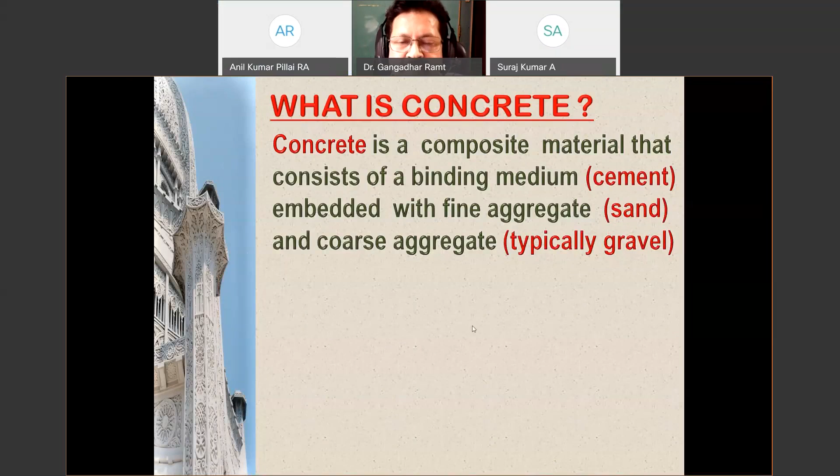The cement and water form a paste that hardens and bonds the coarse and fine aggregate together. Coarse and fine aggregates, on the other hand, are basically inert fillers possessing good strength and durability - these are important features of coarse and fine aggregate. Concrete is often looked upon as a man-made rock, meaning the strength of rock combined with the shape and size of our willingness - that combination is concrete. So concrete is often looked upon as man-made rock.

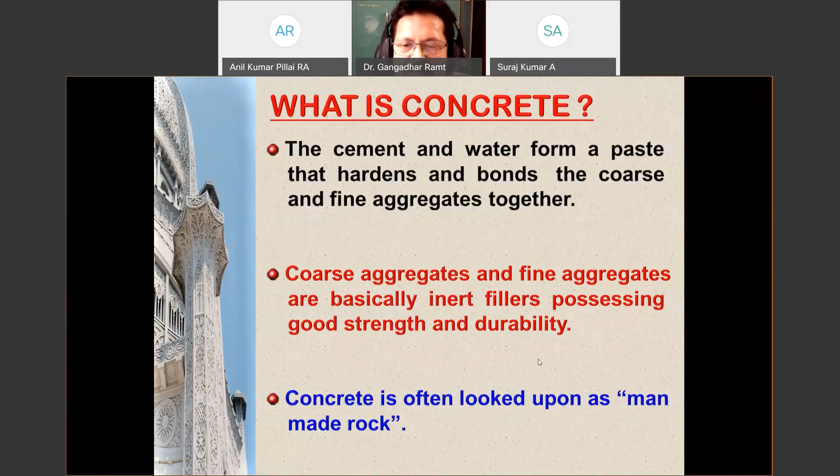Because of all this simplicity of making concrete, concrete is by far the most widely used building material worldwide, next to water. The primary reason for its huge consumption is that it possesses excellent resistance to water, meaning a good waterproof structure can be constructed using concrete.

Its ability to be plastic initially and solidify after a few hours is another good property. Whatever shape we like, we can cast that and make a stone out of it. That is the specialty of concrete.

Most importantly, it is readily and economically available at site, because in concrete only the cement is factory manufactured, apart from new chemicals being added. The coarse aggregate, fine aggregate, and water are locally available materials, hence it is economical at site.

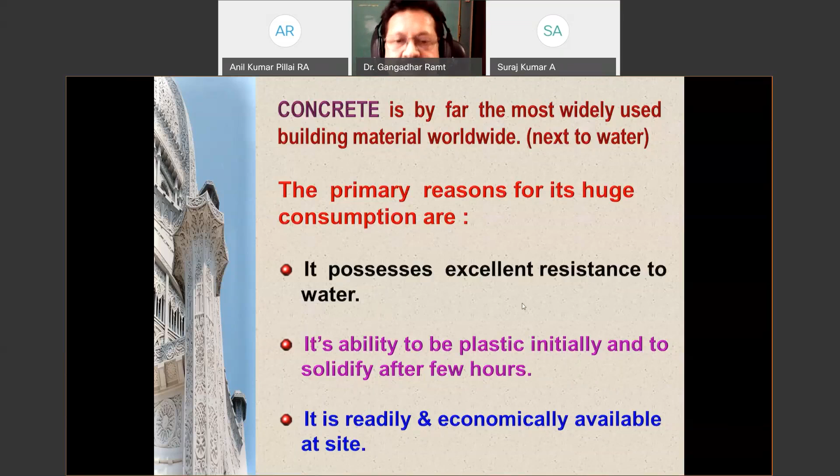The main advantage, first, is its mechanical property. From a structural engineering point of view, we look at high strength. Concrete gives us high compressive strength, but it's not only high compressive strength that's important. We also require high modulus of elasticity, because we don't want high deformation. We want, with small deformation, to achieve this high compressive strength, so it can be used for building purposes without losing serviceability. This is provided by concrete, and is the first property that makes it important as a building material.

The second is durability. It has very good weathering resistance, but with a question mark. The question mark is not on the concrete itself, but on the way we are casting and doing the concreting work - whether we are compacting it, curing it, or giving proper cover to reinforcement. These are issues attached with durability rather than concrete itself. Concrete gets defamed because of inability in execution, that is what I feel.

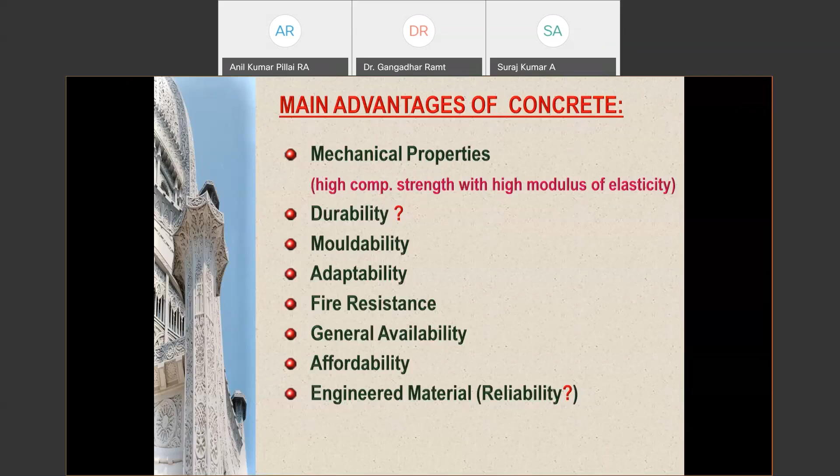It has good moldability and adaptability, meaning wherever we want we can use it, even in deep sea areas and freezing areas concreting can be done. Its adaptability, moldability, and fire resistance are good. General availability means almost everywhere we get cement plants, and basic materials like coarse and fine aggregates are available everywhere. It is quite affordable, and it is an engineered material - 60-70% is locally available material, and factory-made material is only cement. It is also a reliable material, meaning we can assure its strength if properly made. These are the basic advantages and specialty of concrete as a building material.

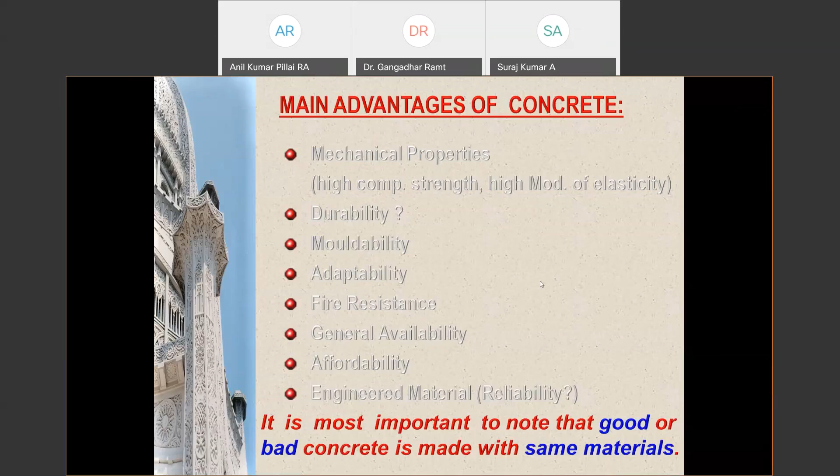In that sense, it's most important to note that good or bad concrete is made with the same material. This point we must keep in mind - good and bad concrete are made with the same amount of material; it's only a matter of our involvement. The basic components are cement, aggregate (fine and coarse), water, and admixture - these form the basic ingredients of concrete.

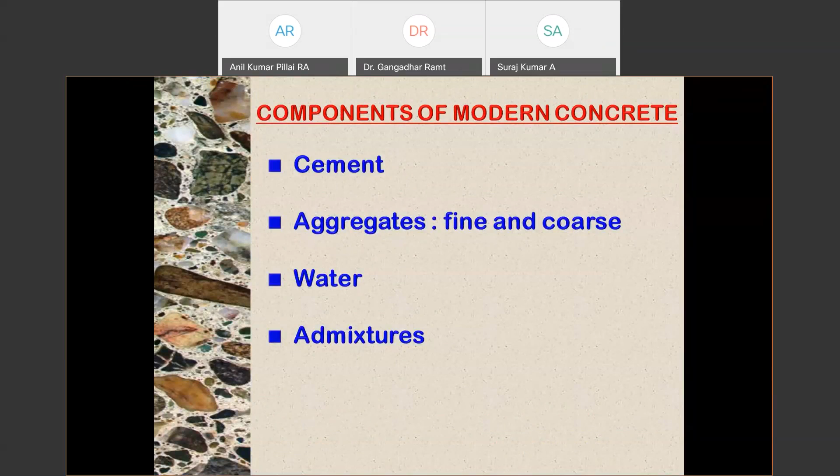The biggest question for today's presentation is how to make good concrete. I hope every engineer and architect will agree that good concrete can be made by the positive efforts of an engineer or architect. If we agree with this, we must also agree that bad concrete can be made by the ignorance of the same engineer or architect. So positive effort can make good concrete, and ignorance of the same engineer can make bad concrete. It is not the concrete that is good or bad, it is our human effort that may be positive or ignorant.

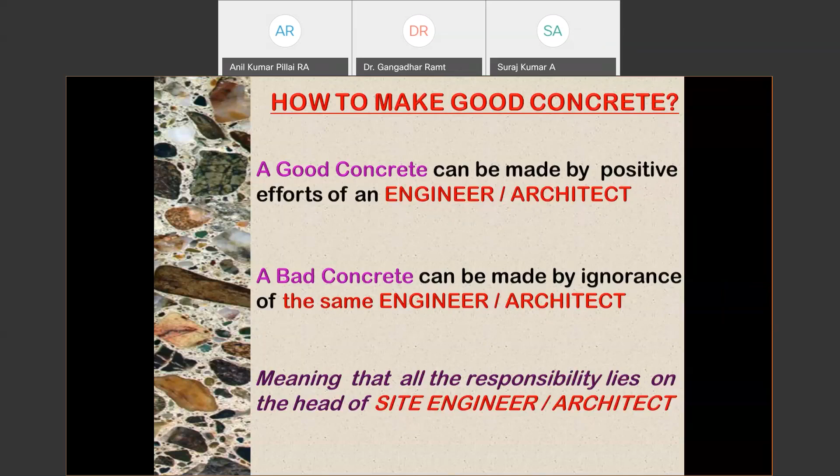So all the responsibility basically lies on the head of the site engineer. We must remember that concrete can do wonders if properly made - there are wonderful structures worldwide which reflect the gigantic test and good quality of concrete. But at the same time, concrete can do blunders if not made properly, and we see many blunders associated with concrete structure systems. It all depends on what effort, what way of effort we have put in.

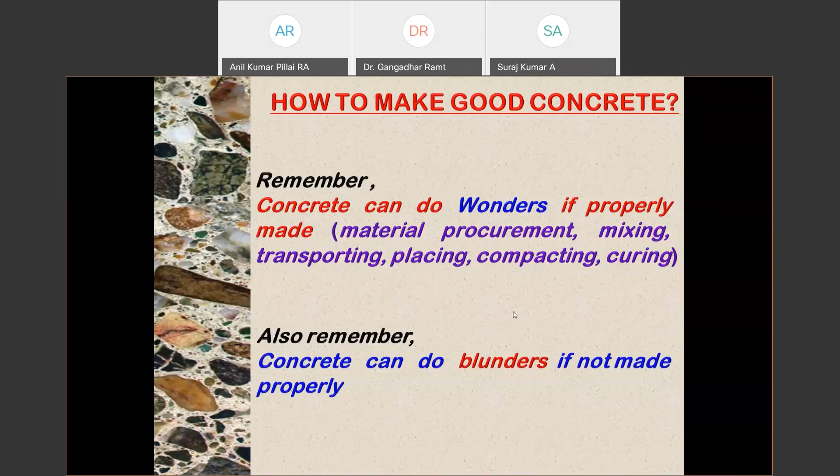Now coming to the necessary steps for making good concrete.

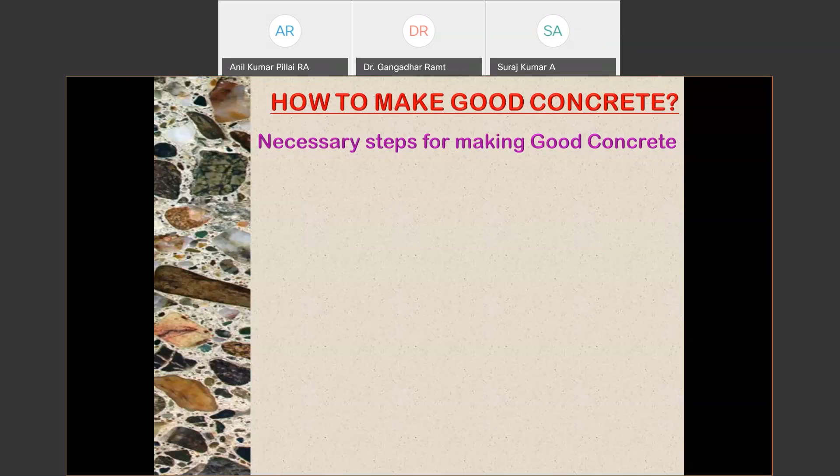The first step is the need for brushing up knowledge by a field engineer and architect. This is very important because at many places I've seen that once students pass out from institutes, they go into the field and leave their books and courses aside, completing work based on whatever knowledge they have or whatever the masons tell them.

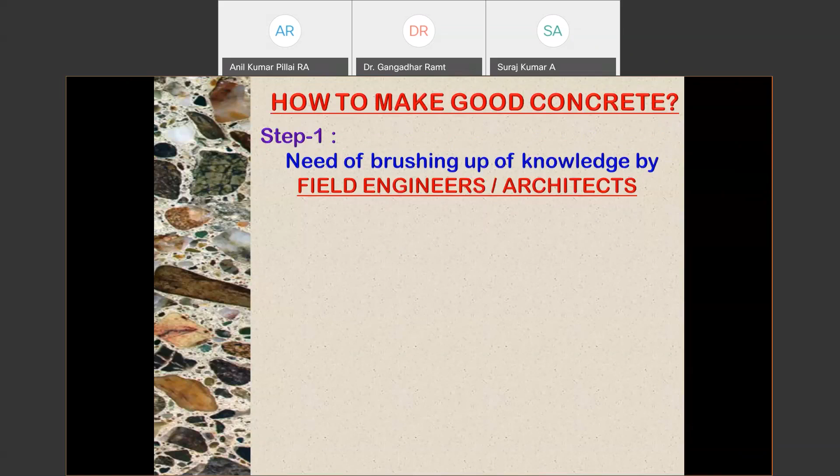So it is very important to have something like a book. My point is that kindly have a hard copy or soft copy of the relevant IS codes and a book on concrete technology. It may not be for daily reading, but for referring whenever required.

Whenever we find some problem or issue in concreting, come back home at night and brush up on those things. It is given in the literature in a more justified and logical way, elaborated in the books. That will make our knowledge more sound for the field engineer. This is the first step basically for making good concrete.

One important thing is engineers and architects should educate their fellow persons involved in the concrete making process, because the actual person involved is the one associated with the mixer and compacting of the concrete. Sometimes, because of their experience, they don't listen to the engineer if he is younger in age. But it is our job as field engineer and architect to make them understand the relevant importance of each and every process carried out for making good concrete.

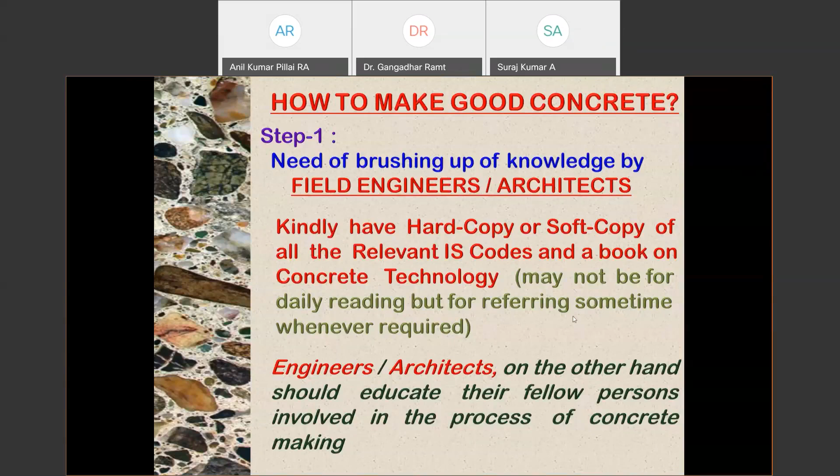So this is the first step. Now coming to the second step, procurement of material. It is very important. We generally go with whatever coarse aggregate and fine aggregate is available locally, and sometimes with cement certain priorities are fixed, but otherwise it is also taken that way.

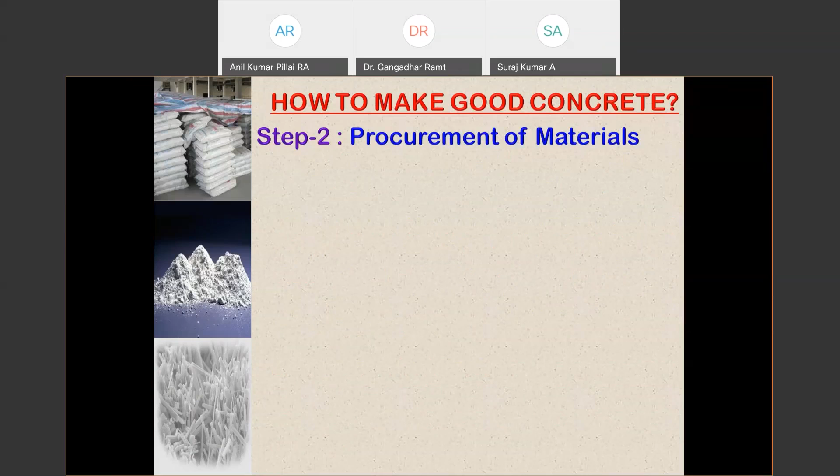So procurement of material - I would like to talk about cement first. Cement is a factory-produced building material used as a binding material for concrete because of its property of having good adhesion with the aggregate. It binds properly the stone pieces like coarse and fine aggregate with strength in presence of water. This is what cement actually is.

A variety of cements are available in the market, but nowadays OPC is not highly used. PPC and PSC cement are mostly used because of their advantages from a durability point of view, and they're in special demand now. OPC is manufactured in the factory. There are many other cements, but for general purpose these three categories are being used.

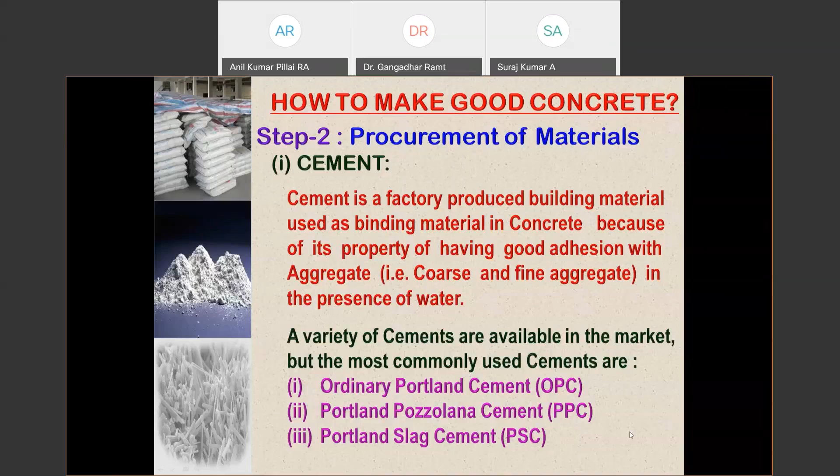Since cements are manufactured under good quality control in sophisticated factories, one can rely on its quality because it goes through various quality checks there. However, for the field, IS code provides various test procedures for quality checks of cement which can be done at the site laboratory, and that is mostly done in the field.

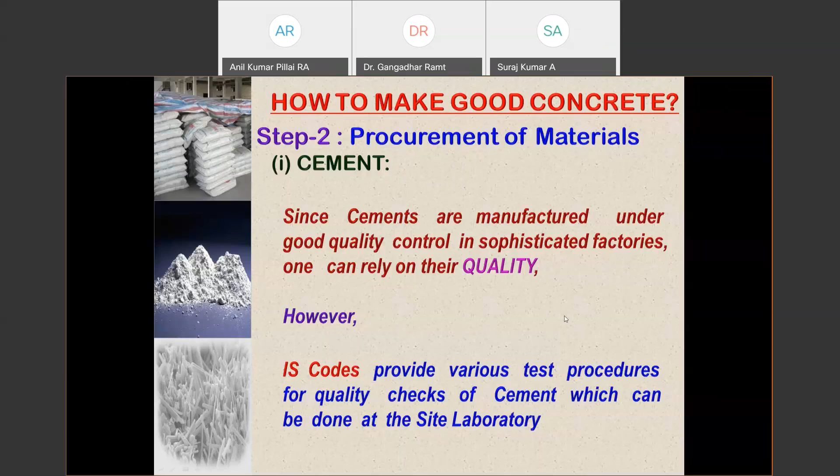Second important material for concrete making is coarse and fine aggregate. If we look at a concrete mixture, it's cement-water paste mixed with inert coarse and fine aggregate, with a very small amount of admixtures if required, which is mostly used nowadays.

By volume, concrete consists of approximately 7 to 15% cement depending on the grade of concrete, 14 to 21% water, 40 to 45% coarse aggregate, and around 20 to 25% fine aggregate. So about 60 to 70% of the total concrete volume is associated with coarse and fine aggregate. A large chunk is associated with this, and hence care must be taken during procurement of coarse and fine aggregate. It is worth noting that aggregate forms a major part of the concrete.

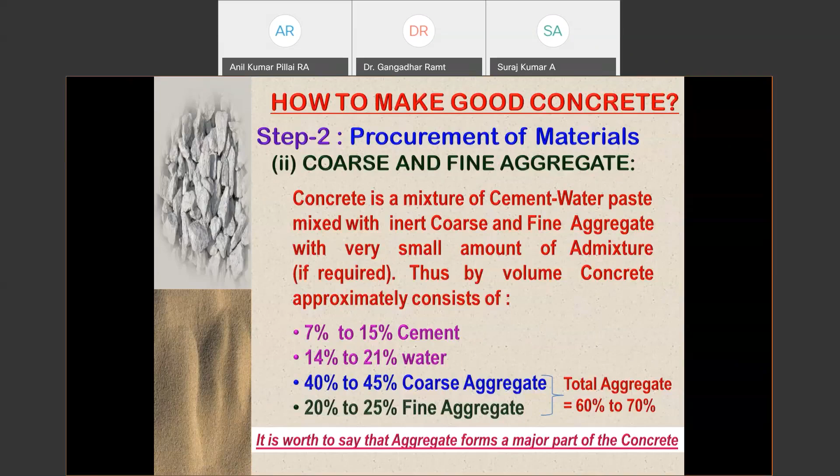Now, why coarse and fine aggregates are basically used - they are the cheap filler.

Aggregates are cheap filler cost-wise; the unit volume cost of coarse or fine aggregate is much cheaper compared to cement, and strength-wise it is good, very hard material. Importantly, it provides volume stability. A pure cement cube versus a concrete cube, volume stability will be more with concrete. It reduces volume changes, shrinkage is less, and it provides abrasion resistance as well. These are the important features of using coarse and fine aggregates.

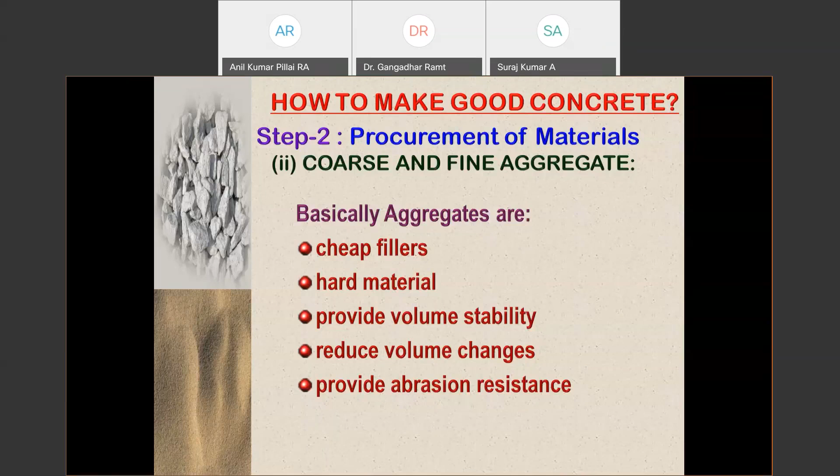There are a variety of coarse aggregates available in the field. Rounded kinds of coarse aggregates are available, basically from rivers. Since they are rounded in shape, the surface area is less, hence with less cement paste we can have a better workable concrete. Moreover, the possibility of these stone pieces breaking under loading is very less, almost not there. Hence they are good for making concrete, but these are not readily available everywhere.

What is available are two types: crushed stone in cubical shape, and crushed stone in elongated and flaky shape. So a combination of all these we are getting. We must assess the percentage of this bad material, elongated and flaky material, because if it is cubical material like this, the chances of breaking under loading is very minimal, almost not there.

But if we have elongated or flaky material in our concrete, under loading the first thing it will do is break into pieces because of compressive load, and because of its elongated and flaky shape, it will easily be crushed under loading. Once it is crushed, cracks are formed, and under further loading there will be stress concentration and propagation of cracks, leading to early failure of the concrete system. Hence this material should not be used.

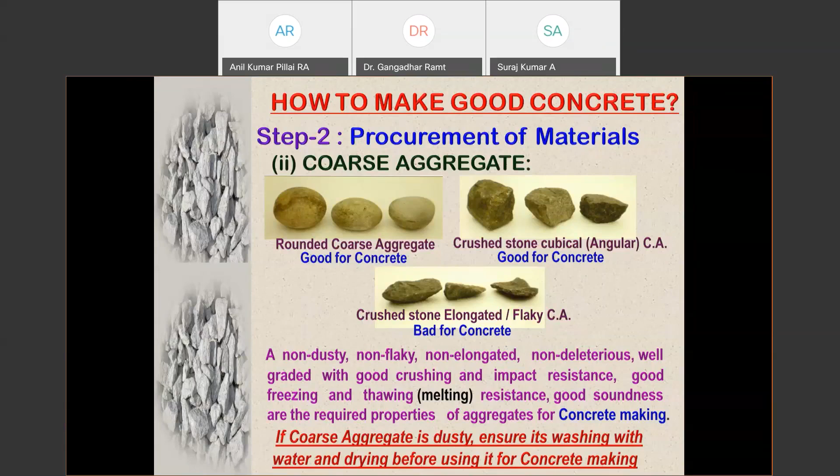Hence, if coarse aggregate is dusty, we must ensure its washing with water and drying it before using it for concrete making, because this makes a lot of difference in strength. If we compare a washed dusty coarse aggregate particle versus using it without washing, there is, I can say, 50% strength remaining with dusty aggregate, even less than that I can assure.

Similarly, about fine aggregate, what we require is non-silty fine aggregate. How to find out if sand has a larger percentage of silt is just by pouring it into our hand. If we get our hand filled up with dust, then it has a large amount of dusty or silt particles in it, which is not good for concrete making, because it forms lumps and proper cement binding does not take place.

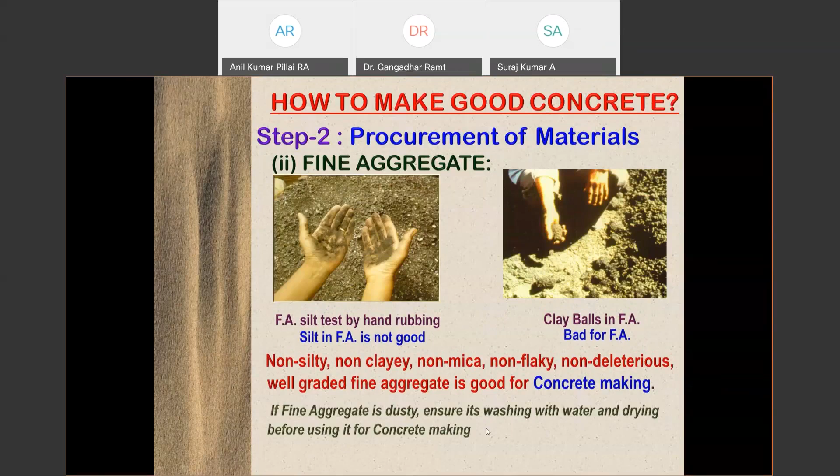So what should we do? What is required is a non-silty, non-flaky, non-mica, non-deleterious, well-graded fine aggregate, which is good for concrete making. Now, if fine aggregate is dusty, we must ensure its washing with water and drying before using it. This is also an important task before us for using fine aggregate in the field.

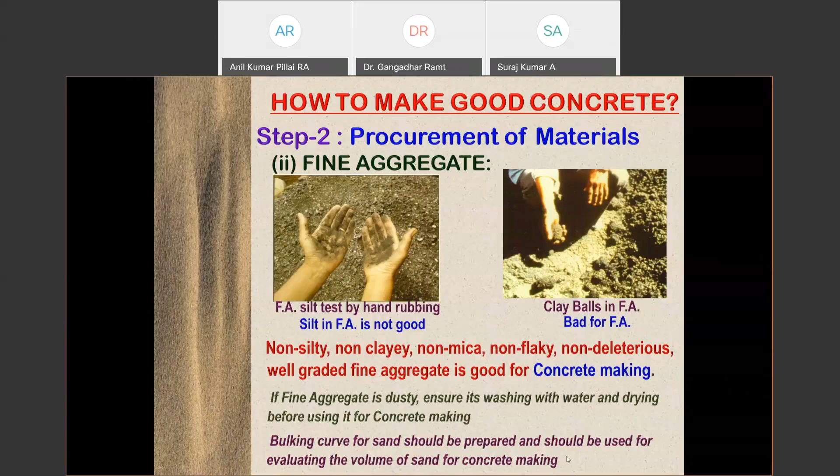Bulking curves: because there is a phenomena of bulking that takes place when sand is moist, a bulking curve of sand should be prepared and used for evaluating the volume of sand for concrete making. So this is about fine aggregate. Now the third material that comes is water.

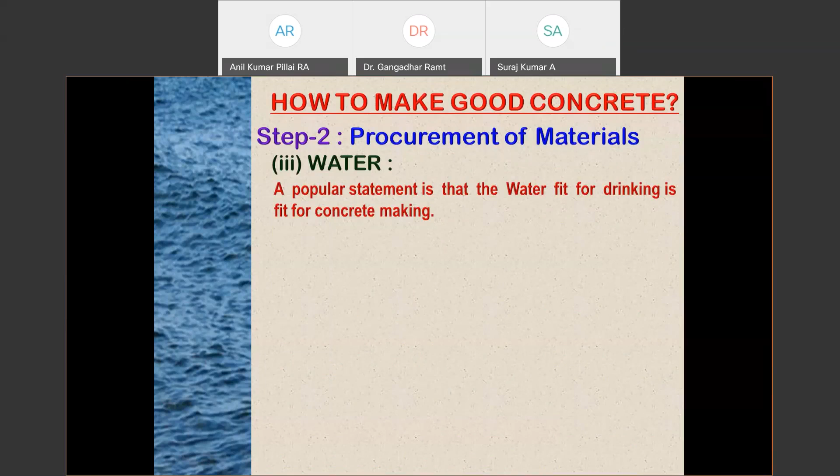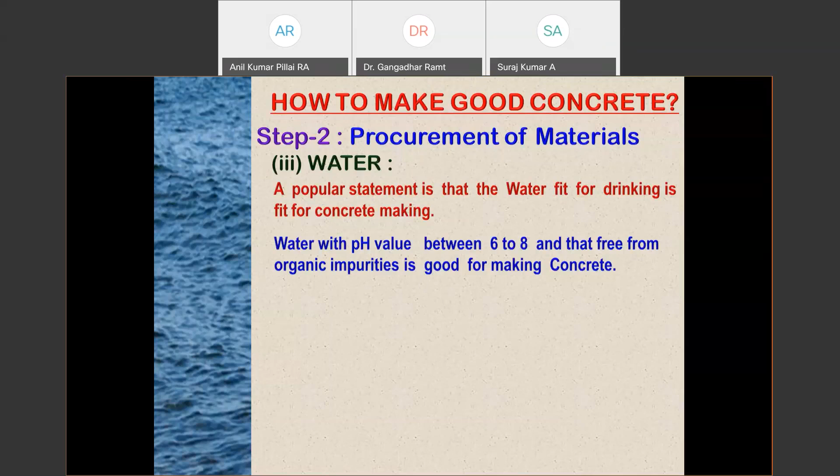A popular statement about water is that water fit for drinking is fit for concrete making. But these days, getting water fit for drinking, exclusively for drinking purposes, is a difficult task itself. What about concrete making then? So it is a difficult task to get suitable water in many locations. It is said that water with pH value between 6 to 8, and free from organic impurities, is good for making concrete. These statements are correct, but how to find if water is good or not when it's not drinkable water, that is the question.

Means if somewhere we have a pond or a river to get water from, then with the available water on site, also make a companion cube with the same ratio proportion of cement, coarse aggregate and fine aggregate, but with distilled water, and see the 7 and 28 day compressive strength. If the strength of the concrete made with water available at site is equal to or greater than 90% of the concrete cube made with distilled water, then the water available at site may be accepted.

This is a field test that can be performed everywhere: we take 20-25 liters of distilled water with us and 20 liters of the pond water, and make two separate sets of cubes with the same ratio. We test after 7 and 28 days and assess if the strength is 90% of that cube made with distilled water. If so, we can take that water into consideration for making the concrete. This is how we can go for a field test for assessing the quality of water for concrete making.

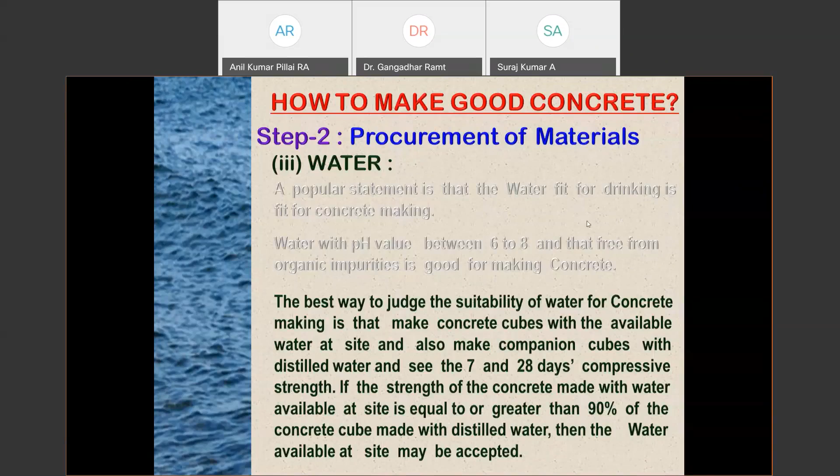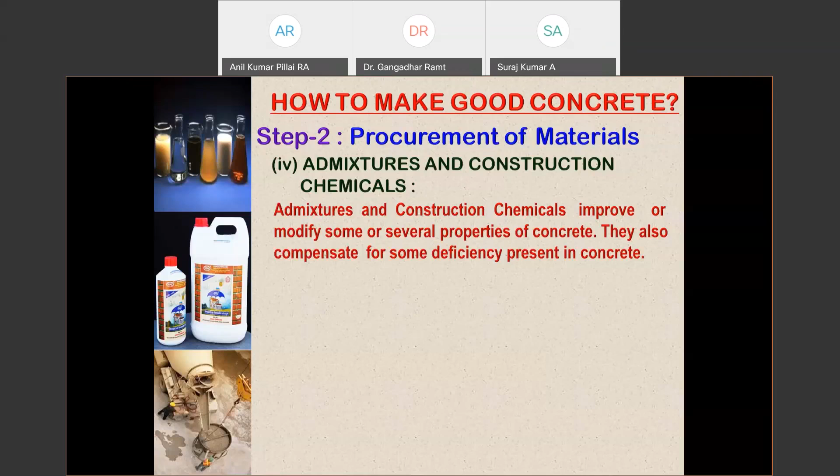Then the fourth, the material, it is in the same step. Step 2 is procurement of material, admixtures and construction chemicals. There is a large number of admixtures and construction chemicals coming up these days. They are making our concrete very good, and by reducing the water cement ratio in many ways, they are doing a good job. So admixtures and construction chemicals improve or modify some or several properties of concrete. They also compensate for some deficiency present in the concrete.

Use of admixtures or superplasticizer reduces the water demand of the mix by deflocculating the cement particles. Due to deflocculation, the cement particles are evenly distributed, hence the quality of concrete improves. So using a superplasticizer is good in that way.

There are other retarders also coming up, because these days it is ready mix concrete. Concrete is mixed at one place, and it may take 2 to 3 hours to reach the site. So in that time, it should not fall into initial setting time, and for that reason, many retarders are also being used as construction chemicals.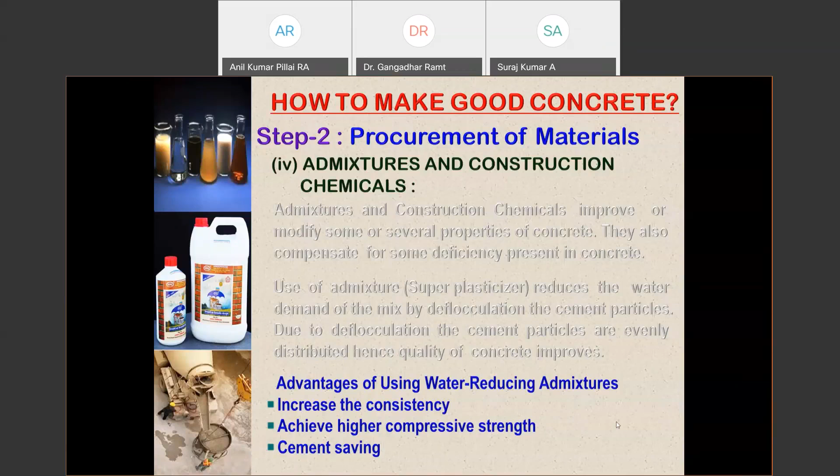So advantages of water reducing admixtures are: it increases the consistency. Consistency is a very important phenomenon, I will talk about it later, but consistency of concrete is very important. Even distribution of the paste, coarse aggregate and fine aggregate is what we mean by consistency. We achieve higher compressive strength, and cement saving is also there in case we are using these construction chemicals. So this is about step 2, that is procurement of material.

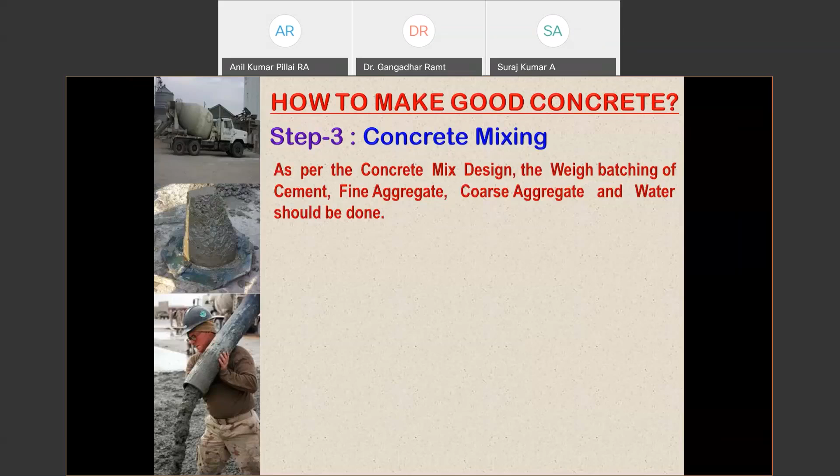Now we are coming to step 3, about concrete mixing. As per the concrete mix design, the weigh batching of cement, fine aggregate and coarse aggregate is done. In our laboratory also, the mix design we give is based on weigh batching, because weigh batching is reliable. But in the field, sometimes people go with volume batching, like 1:2:4 or 1:1.5:3. Even government people are talking in that term. So I would like to say that weigh batching is preferred for concrete mix.

Suitable adjustment for quantity of water, as per the moisture content of aggregates, should be done before mixing. This is another issue.

If it is not possible to have weigh batching in the field due to any reason, then volume batching of the concrete with proper conversion of the ratio water to cement to fine aggregate to coarse aggregate should be done. This conversion, given in weigh batching weight form, should be converted into volume form on the basis of their bulk unit weight. Once that is done, we can say we are actually doing weigh batching, but volume wise.

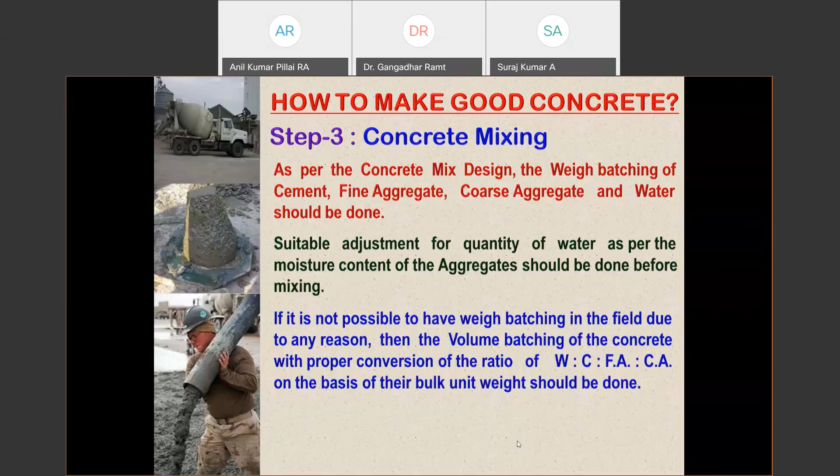The important thing about concrete making is the water cement ratio. All the books talk about its importance. There is Abrams' law since the very beginning, that more is the water, less is the strength. The logic is clear: the amount of water required for chemical reaction is definitely required, and the amount of water for filling up the gel pores is definitely required. But other than that, water remains as water, and after a certain time of casting and setting, it gets evaporated, leaving voids in the concrete. Voids in concrete are pre-assigned cracks, and when pre-assigned cracks are there, it will easily be subjected to stress concentration, propagation of cracks, and failure will take place.

In the field, I found - I'm not talking about sophisticated computerized batching plants or RMC plants, I'm talking about a locally available mixer, where a person is mixing concrete and using it for slab or concrete column making in a building. So there, water cement ratio is the most important parameter for strength.

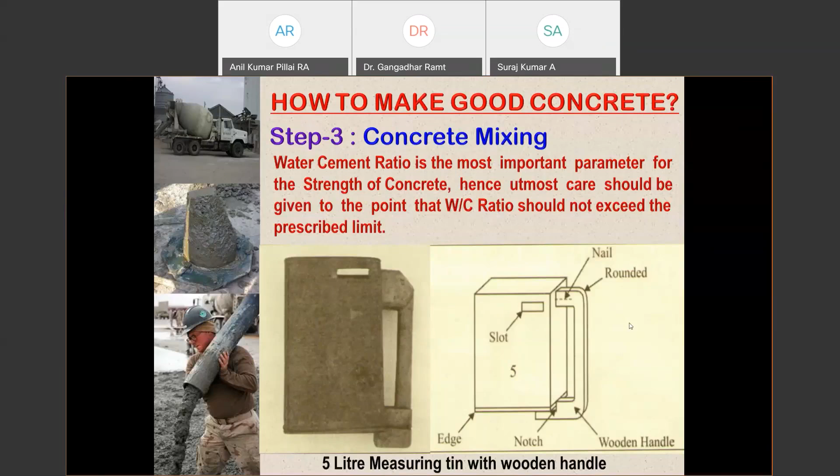Now, once concrete is mixed and taken from the mixer, we see whether the concrete is cohesive or not. Cohesive concrete is similar to making chapatis - there is wheat flour and we add water and mix it. If it is not properly mixed, the chapati is hard, but if properly mixed, the chapati will be very soft and tasty. In the same way, we want concrete to be cohesive, meaning everywhere there is the same proportion of coarse aggregate, fine aggregate, and cement paste.

This is Mr. Remedio, who was a concrete engineer. Recently, some 3-4 years back, he died. He has given certain ways to judge the cohesion of concrete.

What he says is it is the ball or laddu test. Take green concrete from the mixer or concrete heap, about the size of a cricket ball, which is about 3 inches or 75 millimeter. The concrete should be formed and pressed into about a 75 millimeter diameter ball between both palms of the hands.

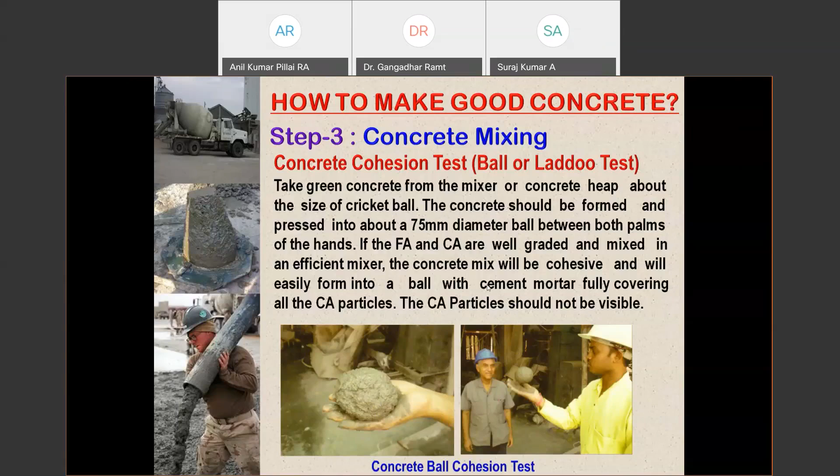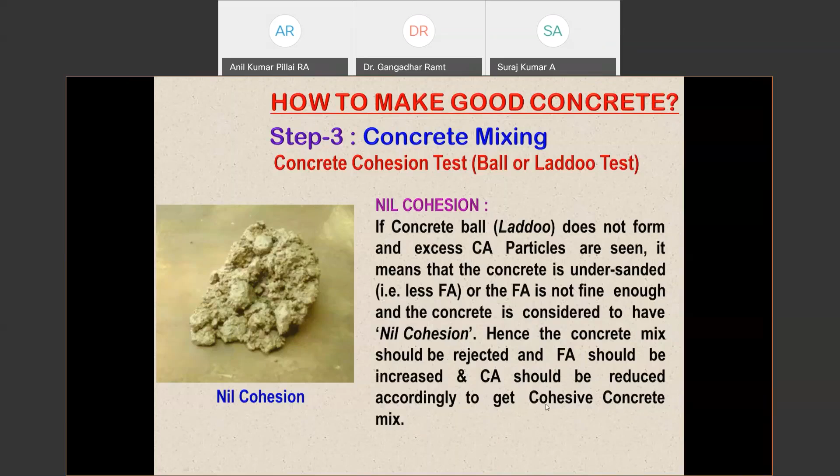Hence the concrete mix should be rejected. This is a trial before actual execution of construction work, and this trial should be done in the field. The concrete mix should be rejected and fine aggregate should be increased, while coarse aggregate should be reduced to get a cohesive concrete mix. This is what it says about the laddu test.

A concrete is said to have poor cohesion if it forms into a ball, a laddu, but some coarse aggregate particles are visible on the concrete ball surface. Then the concrete has poor cohesion.

If this ball is dropped onto a flat surface from a height of about 15 centimeter, 150 millimeter or 6 inches, and if it breaks, it means the concrete is not cohesive enough and is still slightly undersanded, meaning less fine aggregate. Hence the concrete mix should be rejected, fine aggregate should be increased, and coarse aggregate should be reduced accordingly to get a cohesive concrete mix. This is the second case, about poor cohesion.

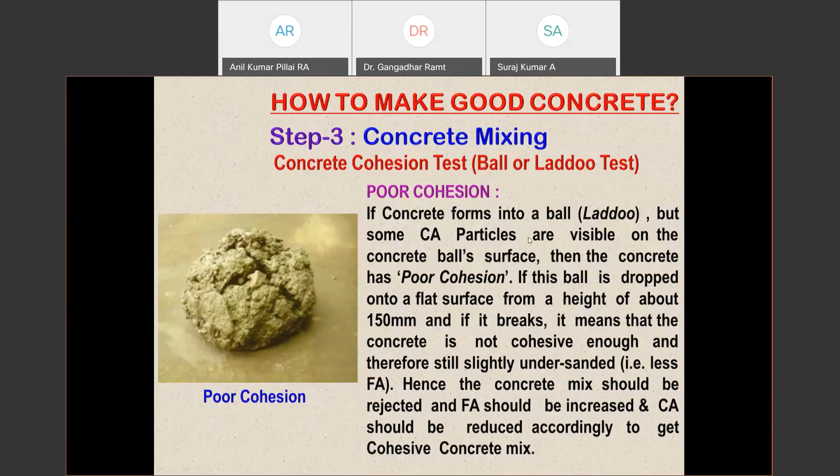This is the figure. Third is about good cohesion. If the concrete ball forms and no coarse aggregate particles are visible, as they are covered with cement mortar, it means the concrete has good cohesion. And if the concrete ball, when dropped onto a flat surface from a height of 150 millimeter, does not break when it lands, it means the concrete has good cohesion. This is how we classify: nil cohesion, poor cohesion, and good cohesion.

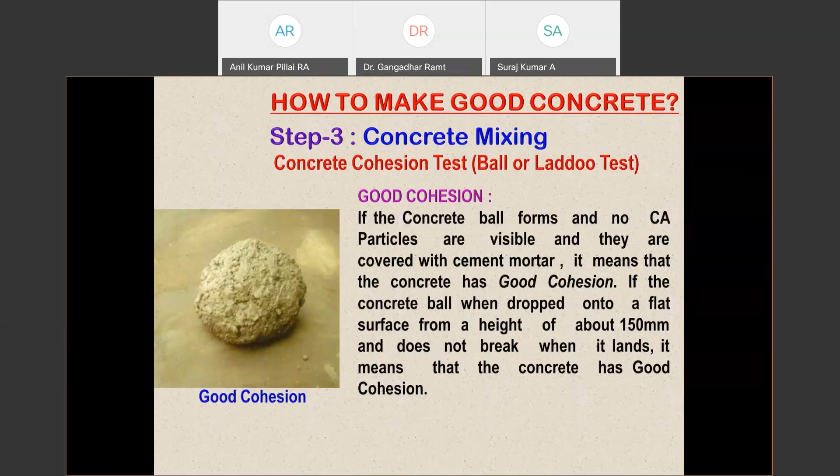There is one thing about poor cohesion also that I have not mentioned because of paucity of time; one can look that up. Now about concrete mixing, we must look at the function of the cement-water paste, or cement grout. Understanding this function will help make good concrete. If we don't understand it, we won't take care of it.

So the question that arises is what we should see in green concrete. This is particularly important for new field engineers associated with the job. Whenever there is concreting, he goes and sees what is happening, but sometimes he doesn't know what to look at, whether to say this particular concrete is good or bad. So he must know about the segregation of concrete, what takes place, and the purpose of this cement grout and what we should observe in green concrete.

Here I have two concepts to talk about, and this is just a concept; don't take it as field practice. I am talking about the concept of concrete in terms of the use of this cement grout. I have two situations. One concept I am taking for making green concrete: I am making a heap of coarse aggregate, and naturally that heap of coarse aggregate will have certain voids in it, inside, outside, everywhere the voids will be there.

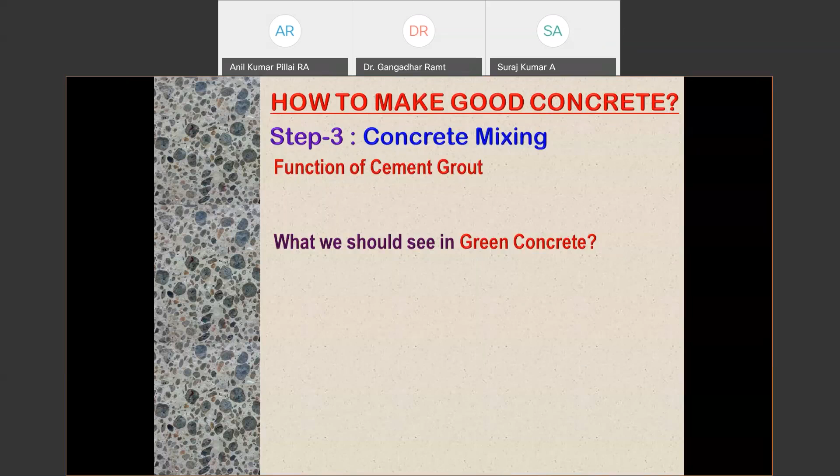So in that way, cement in water forms cement grout, a viscous cohesive slurry like glue. Cement grout has three purposes: binding, filling, and sliding.

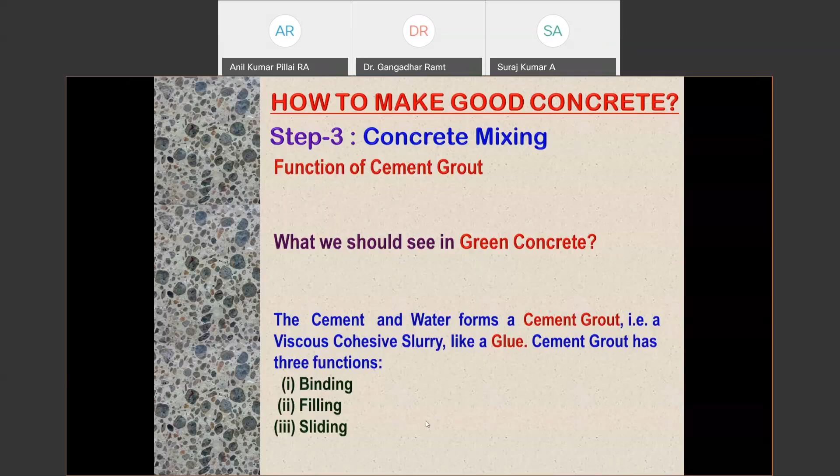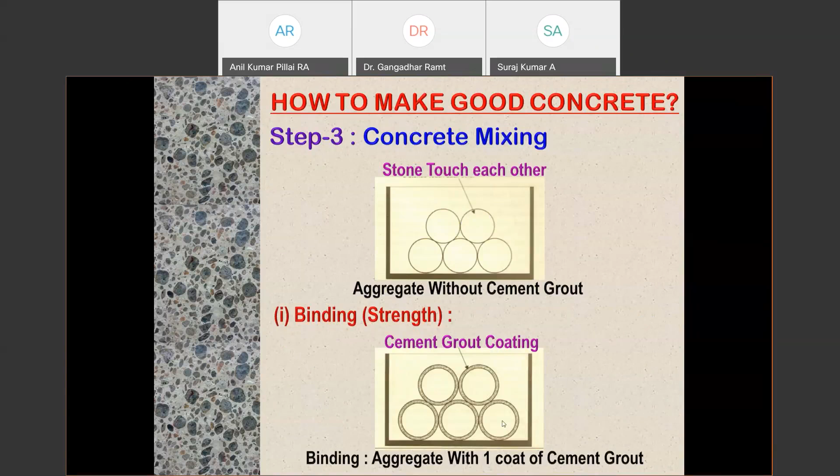In this schematic diagram, if I consider these as coarse aggregate or fine aggregate, they are touching each other. But as soon as I add the binding material, cement grout, I visualize that all these coarse and fine aggregates are surrounded by cement grout. Further cement grout fills the gaps, and then additional cement grout makes it slide, which creates workable concrete. This is the concept of concrete.

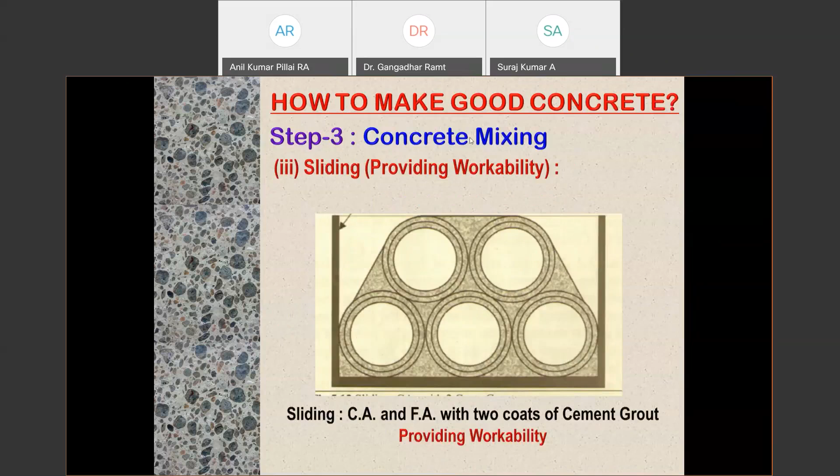So this is about concrete mixing. Now in concrete mixing, the term workability also comes in. We already know about that. Workability is the property that determines the ease with which freshly mixed concrete can be placed and finished without segregation. That is important.

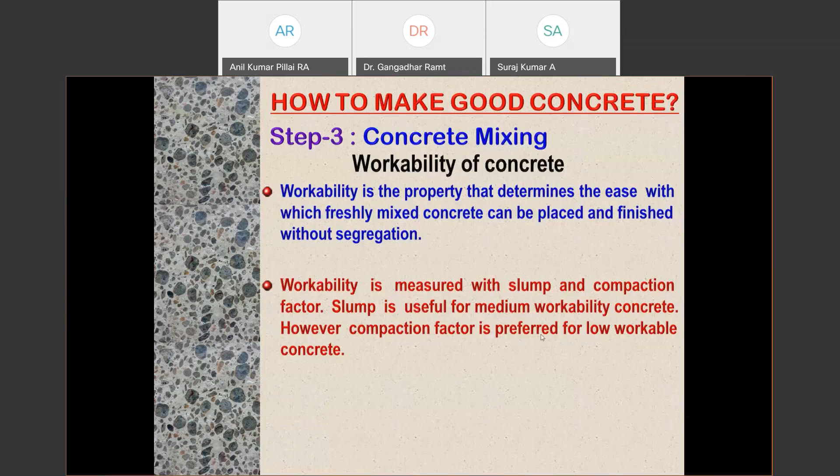Workability is measured with slump and compaction factor tests. There are now many tests available; rheological tests have also come up, but with field consideration, workability is measured with slump and compaction factor. Slump is useful for medium workability concrete, whereas compaction factor is preferred for low workable concrete.

Talking about factors affecting workability of concrete: water content - the higher the water content, the higher the workability of concrete. This is easy to say, but for good quality concrete, water should be the last option used for increasing workability. For increasing workability, we should go for chemicals rather than increasing the water-cement ratio or water content.

It reduces the strength. If more than the required water is added to concrete, cement quantity must also be increased according to the water-cement ratio. This is the option given to us.

Mix proportion: a mix where the voids between coarse aggregates are filled by fine aggregate, and cement paste is only used for binding, is very much desirable. This means excess cement paste should also not be there.

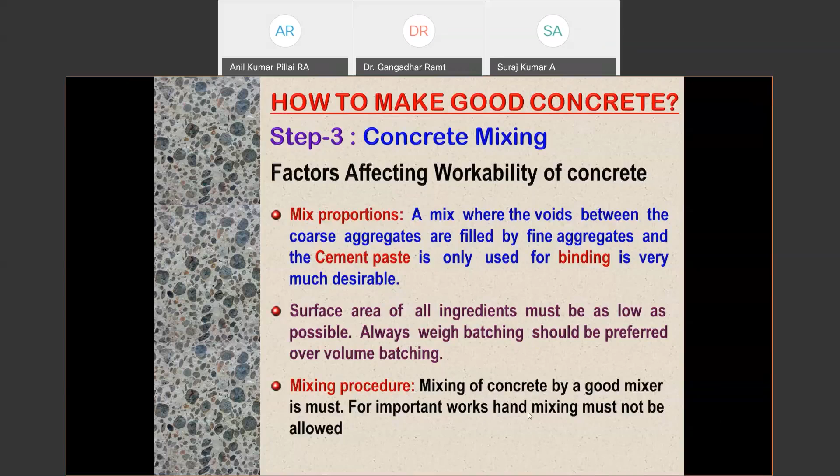Surface area of all ingredients must be as low as possible for workability. Always weight batching should be preferred over volume batching. Mixing of concrete by a good mixer is a must - for important work, hand mixing should not be done. Nowadays hand mixing is not common, but somewhere we still find it done for poor quality work.

The shape of aggregates - angular, elongated, or flaky shapes - will make concrete less workable. The biggest size possible should be used for making workable concrete. As for surface texture, if it is rough, then less workability will be there.

As far as outside temperature is concerned, concreting should be avoided when outside temperature is more than 35 degrees. In a country like India, it is very difficult to get temperature below 35 degrees most of the time. So my suggestion is that important concreting should be done during night time. This is the only takeaway from this point.

Then grading of aggregate - all aggregates must follow desirable grading requirements given in IS 383. It is well known that well-graded concrete will have the least voids. That is important for us.

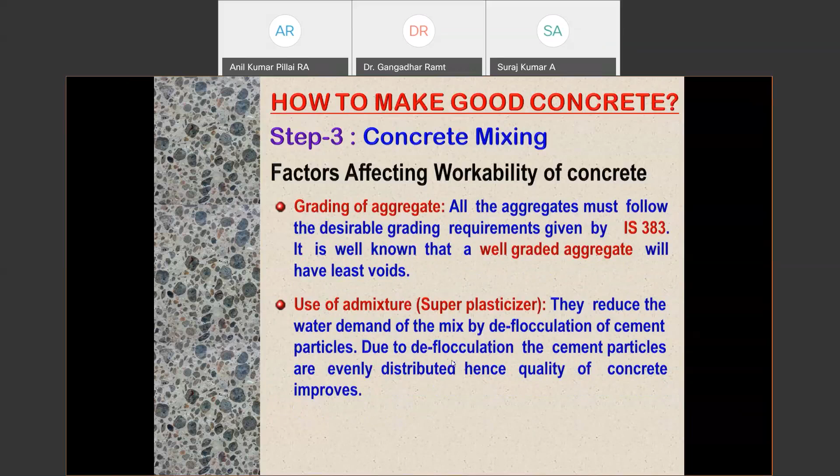And use of admixtures - they reduce the water demand through the deflocculation process, and thus they are good for concrete making and good workable concrete.

Now, once concrete mixing is done, the fourth step we follow is its placing. What should we take care of during placing? It is the compaction of concrete that is most important, and at many places I find that people are not concerned about this compaction.

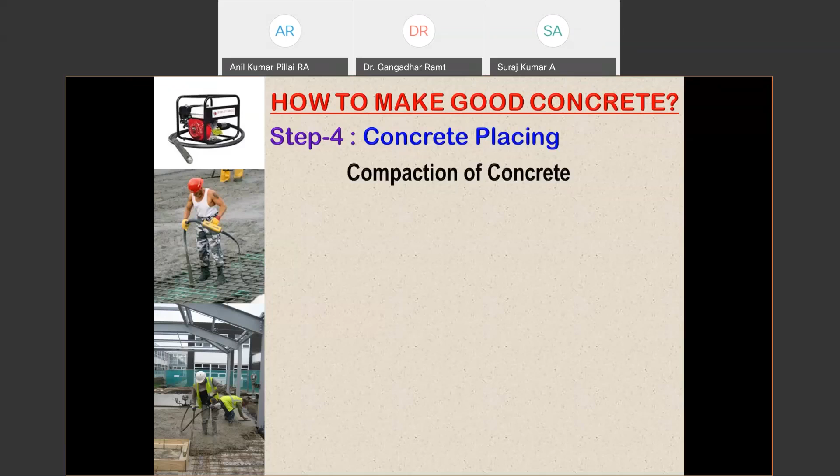Needle vibrators and surface vibrators are available, but in some places people or the associated person don't give it that importance. I find that the surface vibrator is mostly not used properly, and instead concrete is being compacted manually. It is not good - it makes the concrete very void prone.

The presence of voids in concrete is dangerous because they are already involved with cracks in the concrete. So the presence of voids in concrete is dangerous as they result in reduction in the strength of concrete. As an estimate, 1% of voids in concrete results in 5% reduction of the strength of the concrete.

This is the ratio - 5 times we will become the loser, and in the long term it is very difficult and dangerous because it affects the durability as well.

So voids in concrete result in increase of permeability of concrete, thus causing ingress of moisture and CO2, which causes corrosion of concrete and reinforcement. This affects the durability here.

So voids should not be there, and proper care must be given for good compaction. Hence, it is a point to compact the concrete using vibrator while placing the concrete. It should be taken care of everywhere, even for small work.

It should be kept in mind that vibrator must be used, particularly at locations in beam-column joints where there is congestion of reinforcement and where there is most requirement from the earthquake point of view as well, that we should have a void free, good compacted concrete. It is there that most voids are found because of not doing proper compaction using the vibrator.

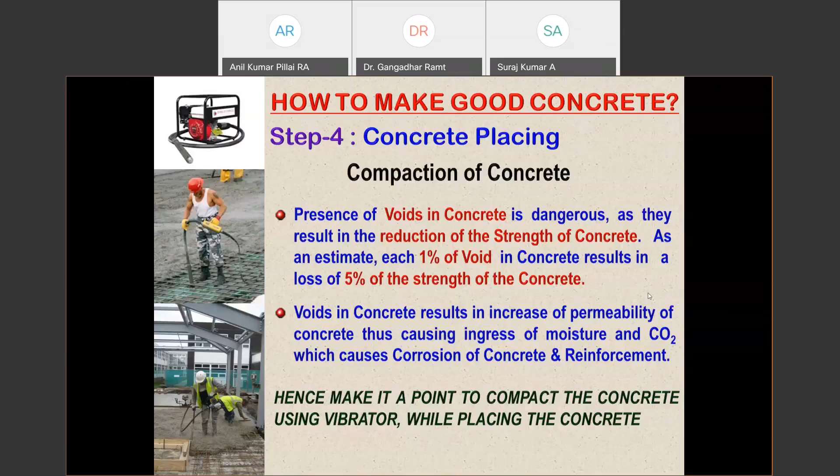So care must be taken that at such locations, and at every location for that matter, we must have good compacted concrete. A site engineer must take care of all these issues. That is what I want.

Step 5 is coming about the curing of concrete. Curing is also very, very important, and all the chemistry of curing is known to most of us. Why is curing done?

Because it is a chemical reaction. It takes a long time. It requires water. An exothermic reaction is there, water is evaporated, and it requires more and more water for completion of the chemical reaction. Only with the completion of the chemical reaction will we get a good strengthened concrete.

All these facts are known, but still people are not giving that importance to this sector. This is a research study done by Professor Mehta in USA, and he has given this chart. I have taken that chart from his book.

It says that if concrete is not cured with water and is in the air for the entire time, if it has a strength of the order of say 50, a concrete which is kept moist for the full time of say 28 days, or even 20 or 21 days, will have even more than double that strength. And this matters.

This graph actually shows the importance of curing, which we generally neglect. We say 'contractor, curing kar diya karo' - but whether it has been done or not, and for the full time and in the proper way, is the question.

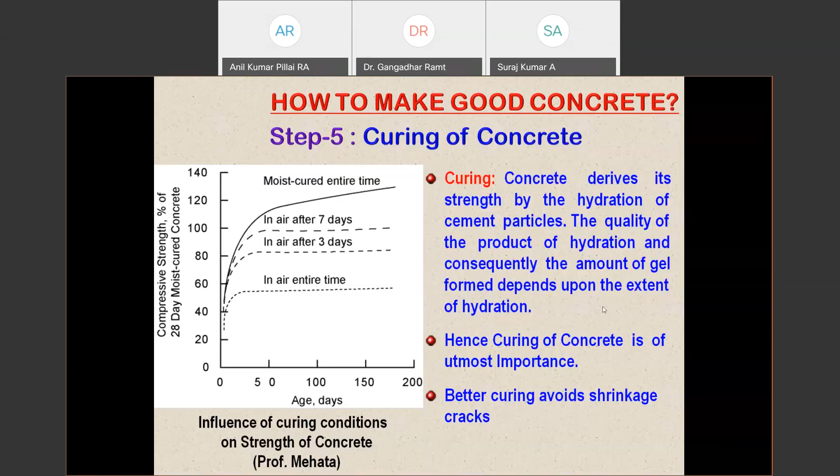We have come from educating the engineers and architects to this 5th step of making good concrete. The final aspect about concrete is that of durability, which has taken a prime stage now in our course also.

In 1978, IS 456 did not give that importance, but in the 2000 code of IS 456, and now also in other codes, durability has taken a central stage, because non-durable concrete defames the person who actually cast that concrete and who was in charge of it.

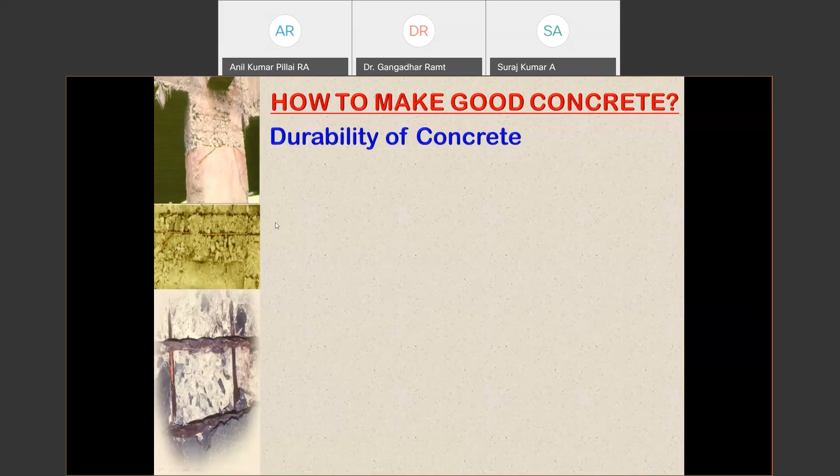So durability is very important. It all talks about the cover to reinforcement, carbonation depth, packing density of the concrete, and permeability of the concrete. Everything is there - how to increase that? There are specific processes available.

If I want to increase the packing density, there are materials like silica fume, metakaolin, etc. to increase the packing density. PSC cement concrete is also good in that sense. There should be proper cover to reinforcement.

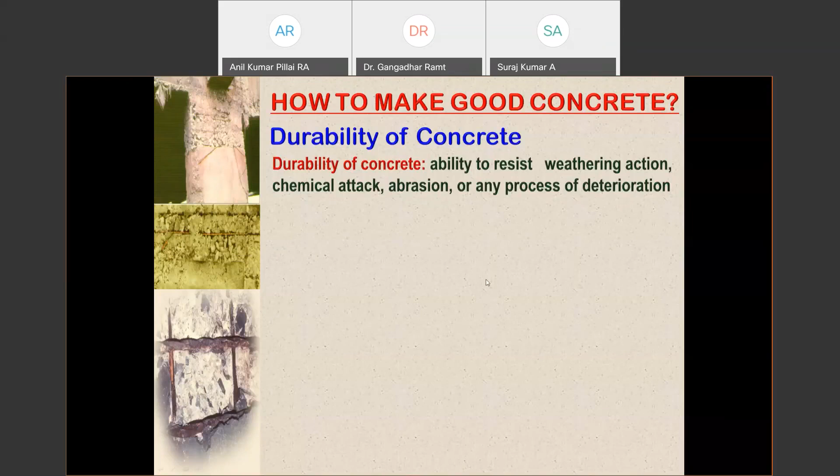Durability of concrete is the ability to resist weathering action, chemical attack, abrasion, or any process of deterioration. Lack of durability results in reduction in the life of the structure.

For this very reason we find a dilapidated concrete structure in very early time of 10 to 15 years. Life of RCC structures are assumed to be 100 years, but actually it hardly completes 50 years. It is even not completing 50 years - in 20, 30 years we see defects on it because of the lack of durability.

This also requires a lot of maintenance to keep the building in service. There is a lot of investment further required. Any treatment will not be as durable as good concrete. Even if we are making waterproofing of our concrete in slab, it will not be as good or as durable as actual concrete.

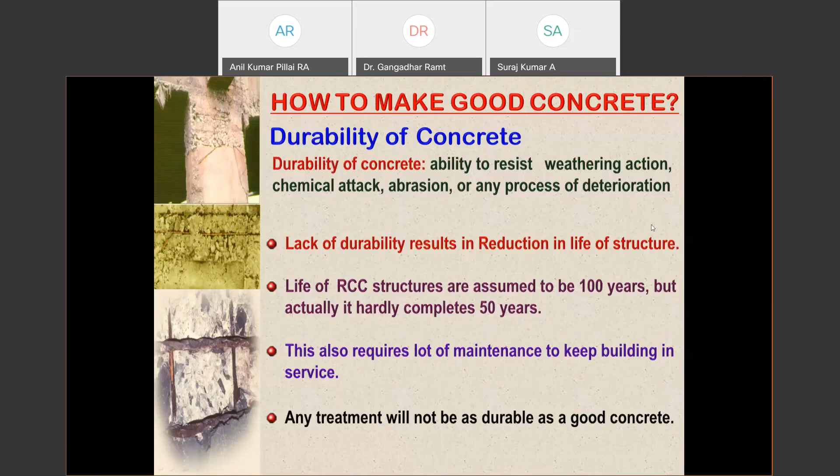Causes of inadequate durability and measures: primarily water, carbon dioxide, and oxygen are most relevant to durability. Their movement in concrete depends on permeability of concrete. Hydrated cement paste has some inherent permeability which can be reduced by use of lower water cement ratio, and there are other ways also to reduce this permeability.

Voids in concrete can be reduced by optimum proportioning of the aggregates, that is, well-graded aggregates. Properties of aggregates vary a lot, hence frequent change in the mix design is required for making concrete, because it is batch-wise - it depends upon how coarse aggregate and fine aggregate we are getting batch-wise. Even cement also we are getting differently batch-wise.

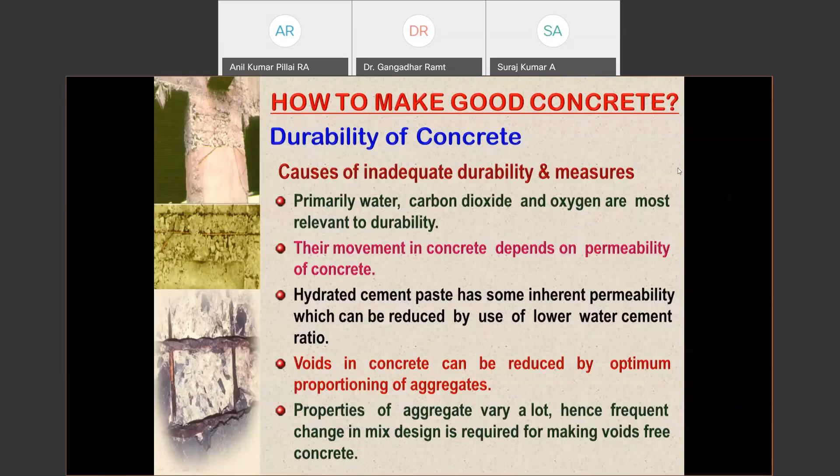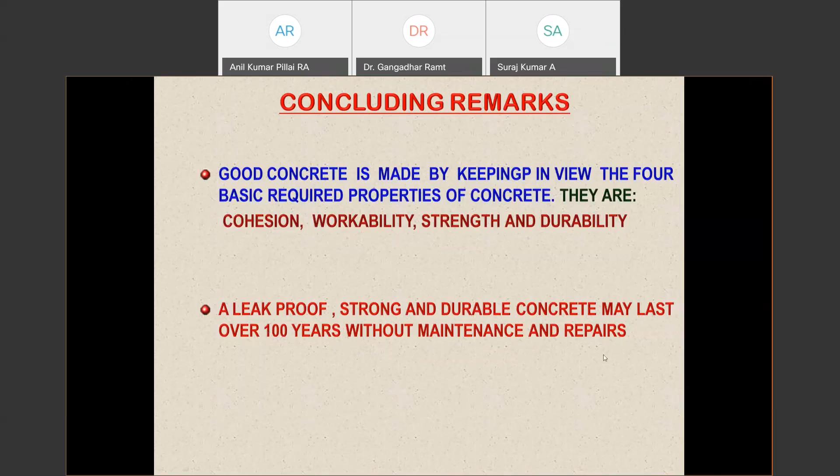Concrete can be a treacherous building material if made without knowledge and strict supervision. That is what we mostly see everywhere. Structures made with poor concrete will leak and slowly crack. Thus, cancer of concrete starts. Ignoring these defects leads to collapse within 15 to 30 years.

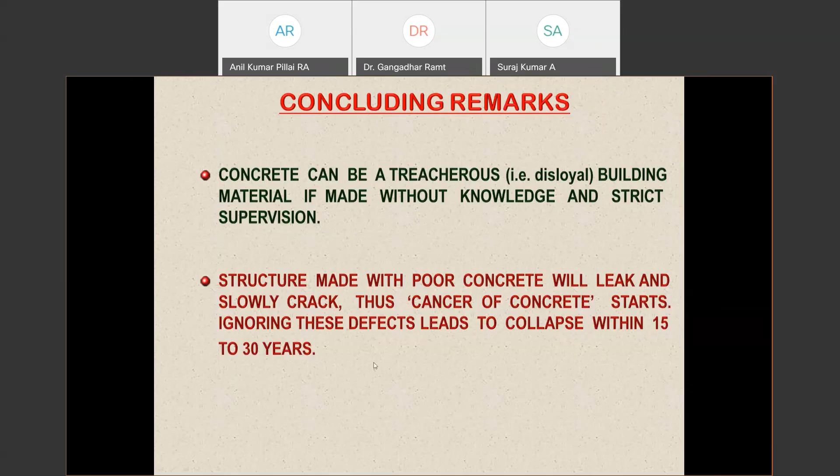Accurate batching of concrete materials, right amount of water, thorough mixing, proper compaction, and sufficient curing are the important stages for making good concrete.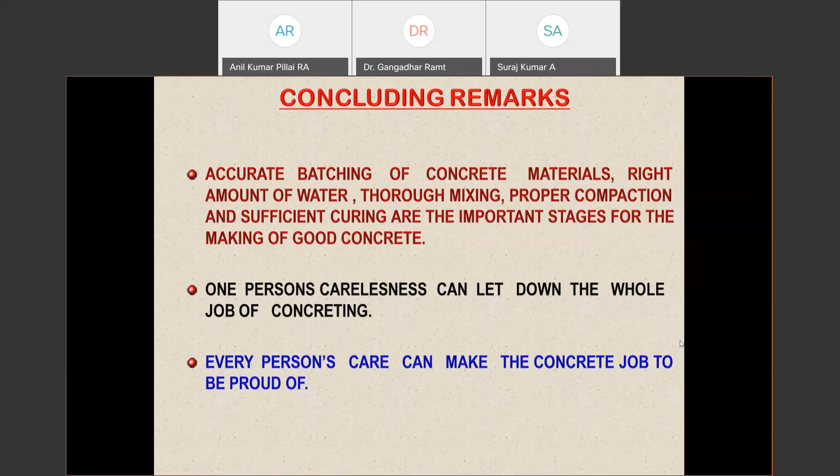Now importantly, these two sentences we must see: it is a teamwork. Many persons are involved in the whole process of building making. One person's carelessness can let down the whole job of concreting, whereas every person's care - not just one person - can make the concrete job something to be proud of. So concrete can always give us pride if properly made, taking all the care that I have narrated, and there are many more such things. If it is done, concrete will give a structure that gives a proud feeling.